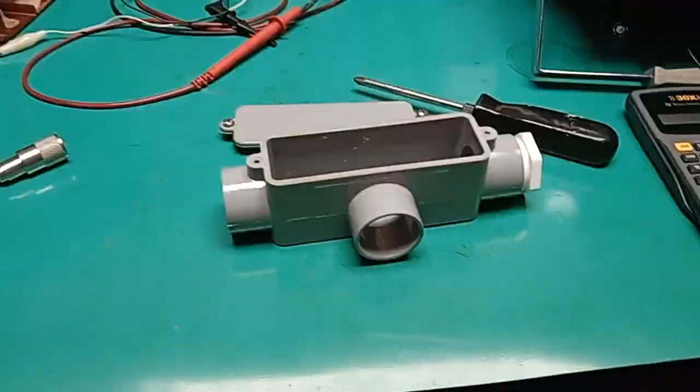And here's a couple feet lower, or a couple feet higher. And here it is in the ham shack, up close and impersonal.

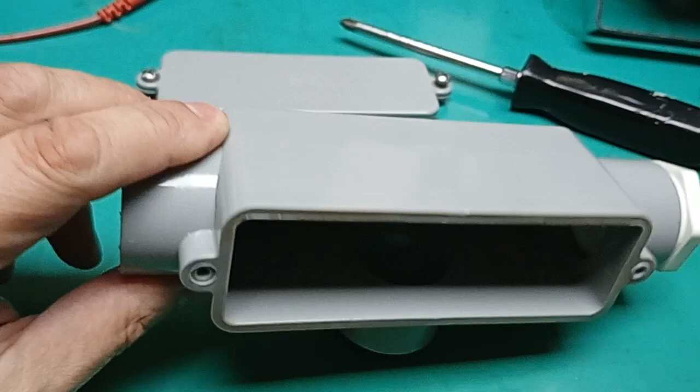1 1/4 inch gray PVC conduit T, I think it's 1 1/4, but there's the tag if you want to go get one. Ideal housing, extremely weatherproof, with a gasketed lid - not perfect, but good.

On the ends, put a 1 1/4 bushing - this one's threaded, but get the plain one - down to 1/2 inch PVC pipe, just enough pipe sticking out to get a 1/2 inch PVC cap over the end.

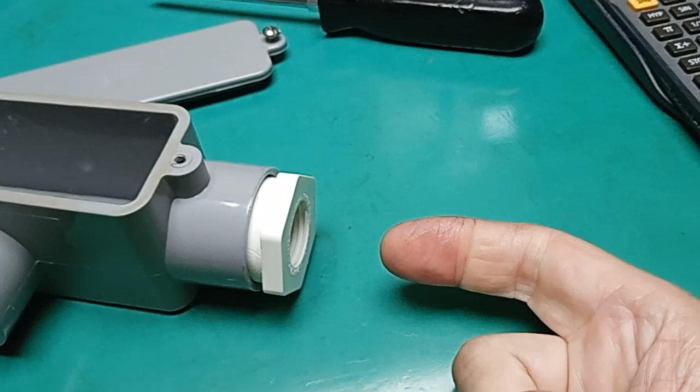The dipole is number 6 wire, number 6 solid. It doesn't kink, it hangs flatter. Make a hole in the end of the cap just big enough to clear the number 6 wire. Wire goes inside - of course, both ends are equal.

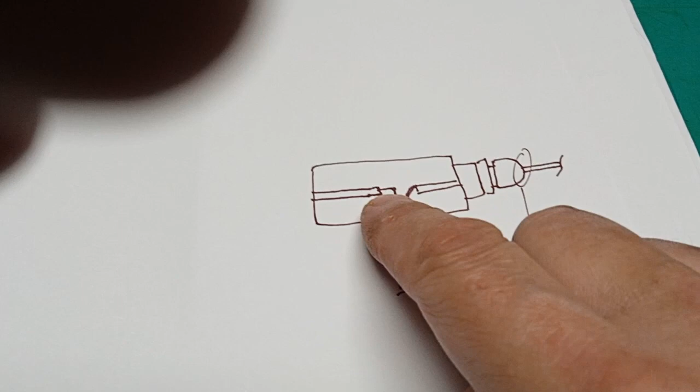Now here's a detail on the inside. Here's the 1/2 inch PVC cap, number 6 wire going through it. Both wires go into the center, maybe 1 inch apart. Bring the feed line up, strip it, relatively short wires, connect them together - straight, 90-degree angles, no bending, kinking, twisting, none of that stuff.

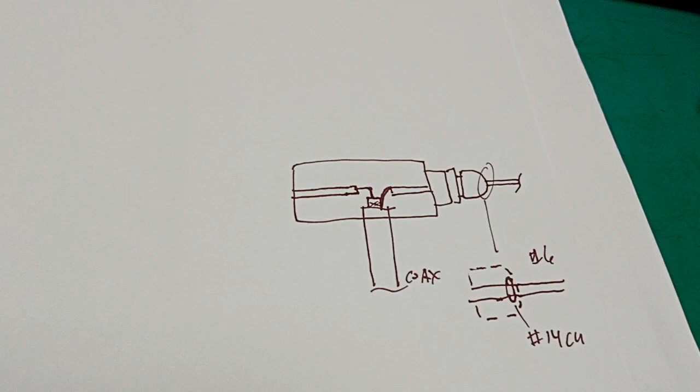Of course, as soon as you hang this up, it's going to pull the wires out of the end - there's nothing to stop it. So up inside the cap, here's the cap, here's the number 6 wire here.

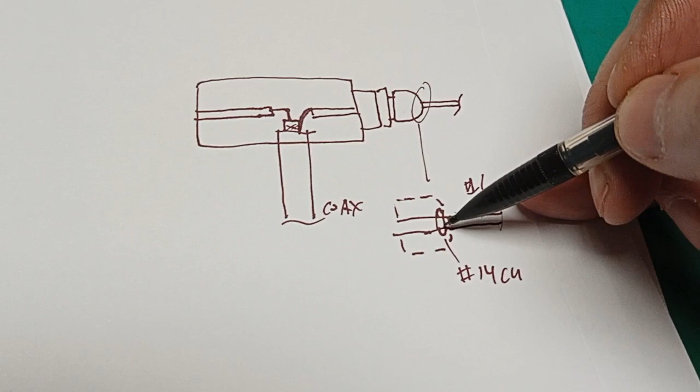Take some number 14 copper wire and wrap it around the number 6, slide it out till it touches the inside of that cap, and then solder it in place. Now you can't do that with the cap there, obviously.

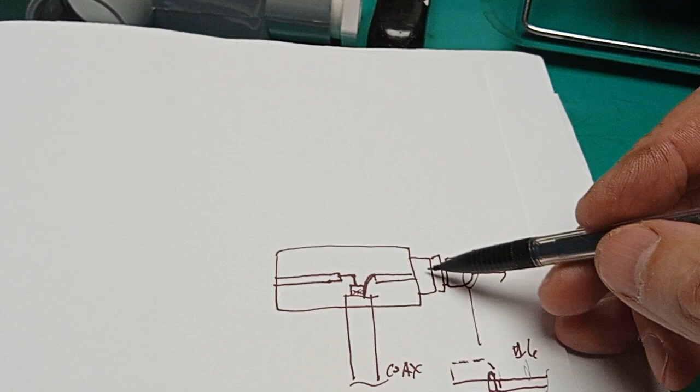You could mark the outside of the wire here, and perhaps take the cap off, slide the number 6 through, solder this on just to the left of the mark, or assemble it in the housing and push the number 14 ring back in here, then push the number 6 wire out of this opening, solder it, and pull it back in. But look at it, you'll figure it out.

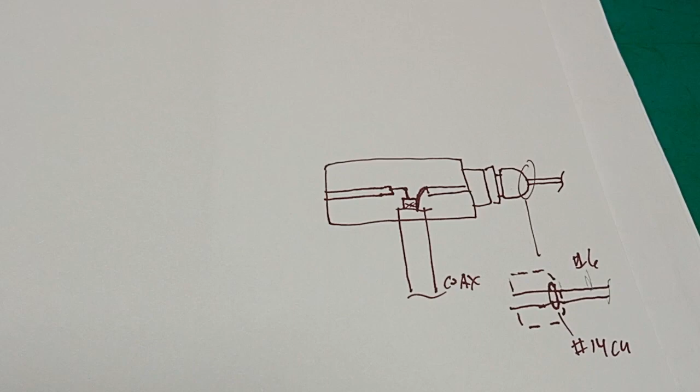It's not that hard. This makes a very strong assembly. The assembly for my 20-meter antenna has this held in with screws.

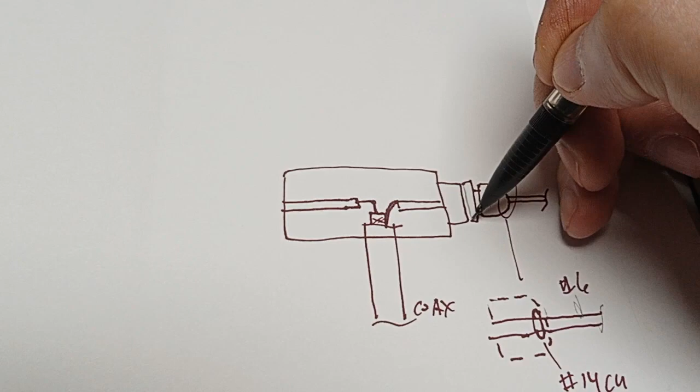Oh, you could use PVC cement, but that's a waste. What's better is Gorilla Glue - you Gorilla Glue that PVC together. It ain't coming apart, not without a hammer.

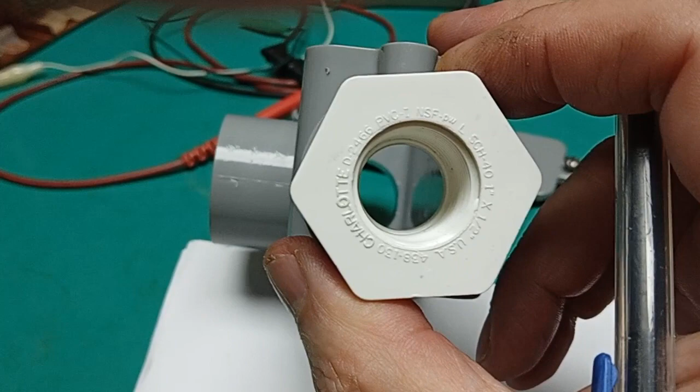There doesn't need to be any real space between the cap and the bushing here. That's a schedule 40 1 by 1/2 bushing, so that must be a 1 inch T, but whatever it is - just find this 1 by 1/2 inch bushing and see which housing it fits.

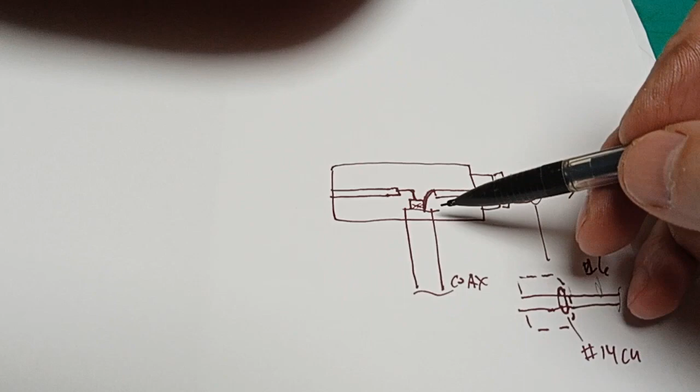I don't have the part numbers. Now, I never recommend having mechanical connections in antennas, because once the thing's working and up there, you're not going to want to take it down for 10 years. Mechanical connections up here are going to fail.

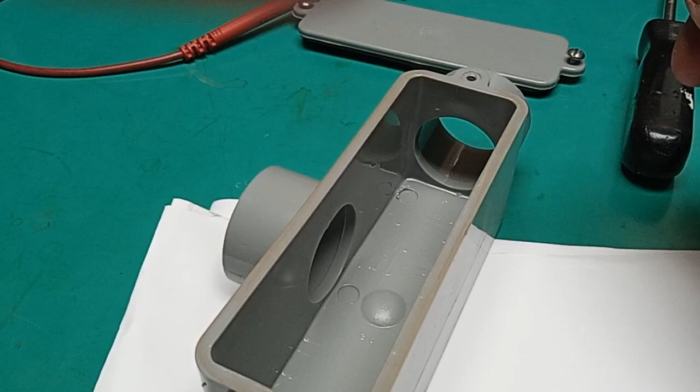You can put an SO239 up in here, maybe glue a plate over here and set an SO connector in there. If you want to do that for portable use, it's up to you. That just adds 2 mechanical connections that fail, especially because there's probably high humidity.

But if not, find some kind of bushing to size this down to clamp the coax in. I used 75 ohm Belden 9064, I think it is. The problem with that is it's an aluminum shield, and I had to clamp it here, and the clamping's failing, so the SWR's up. But use whatever you want.

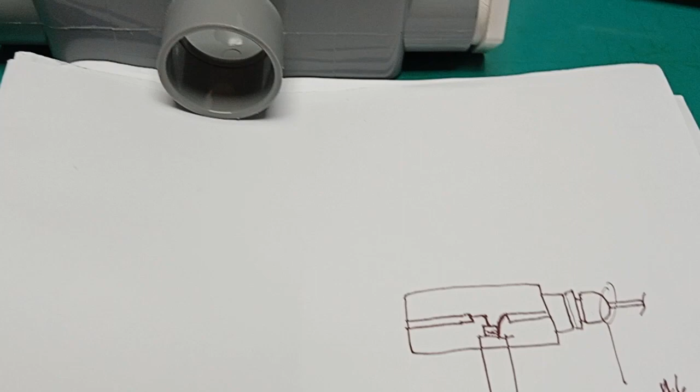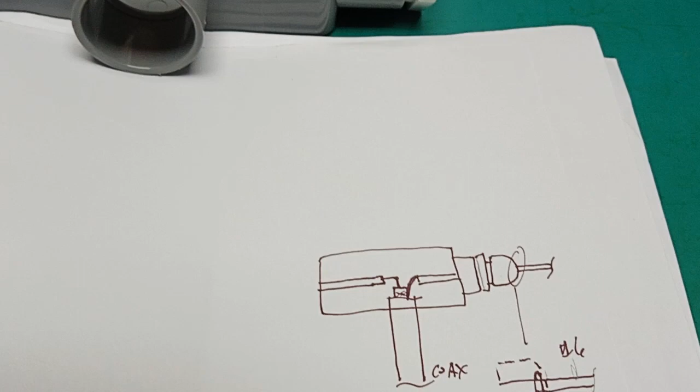If you use 50 ohm cable, it's going to be probably lower than 17 feet, probably closer to 10 or 12 - not all bad. Easy to work on an antenna that's at 12 feet, and it's easy to put it up.

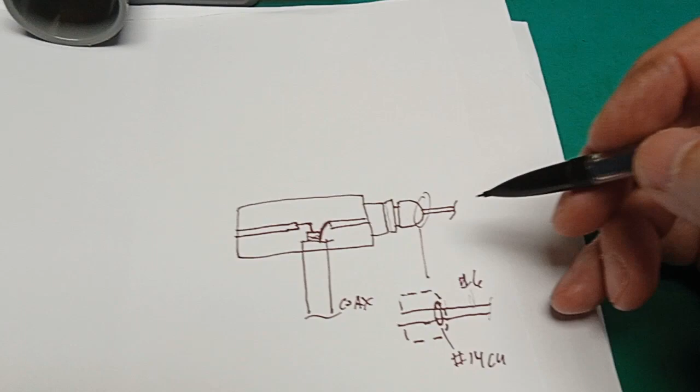But after that, go see my video on how to make a correct dipole and use the 0.951 velocity factor to calculate the exact length of the arms and make sure they're identical. And under no circumstance let the arms droop or bend or deviate - if we're looking down from the top, they've got to be straight in line.

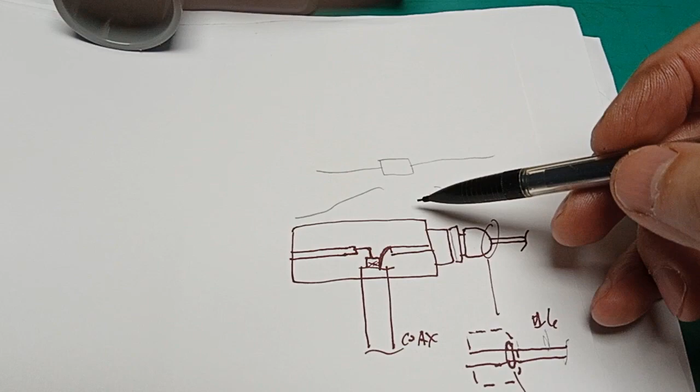None of this - no deviations or sagging. Put the wires right in line, because what I found by testing is that having the feed point dip causes a bunch of reactance at the feed point. It just kills the bandwidth.